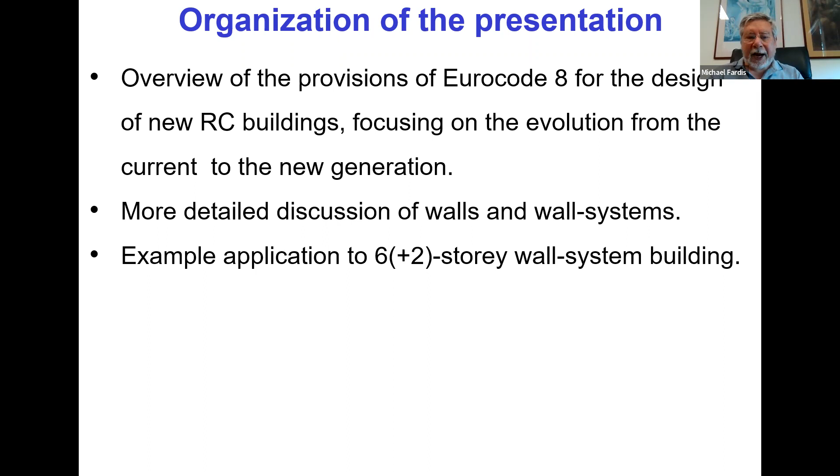Okay, starting on the first part, the timeline of the various generations of the Eurocodes is summarized in this slide.

There was a period in which the pre-standards, the ENV versions, were developed from 1975 until 1992. These were shorter and preliminary versions, which were never applied in practice, but provided the ground for the real Eurocodes.

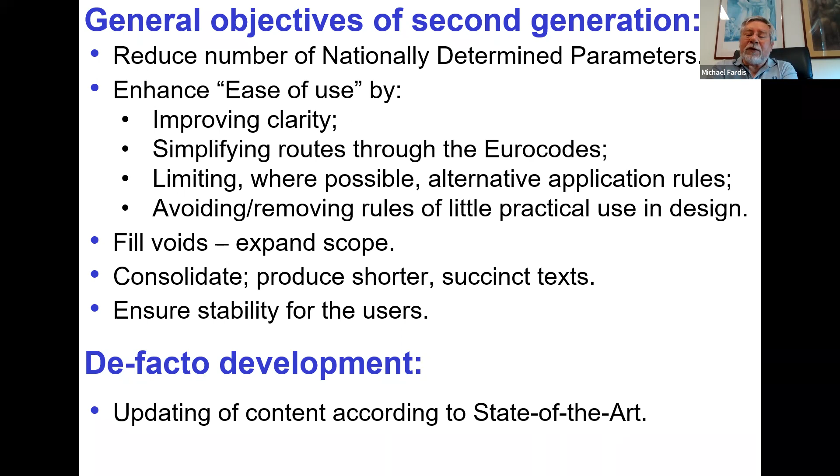In addition, there is a significant effort to add provisions and parts on assessment and retrofitting of existing structures, which exist currently only for Eurocode 8, the seismic design Eurocode.

But the idea is to add similar provisions to all material Eurocodes, as well as to the fundamental Eurocode, EN1990, which is the constitution of all Eurocodes. And this is well progressing. In addition, there is an effort to improve whatever has to do with robustness of structures.

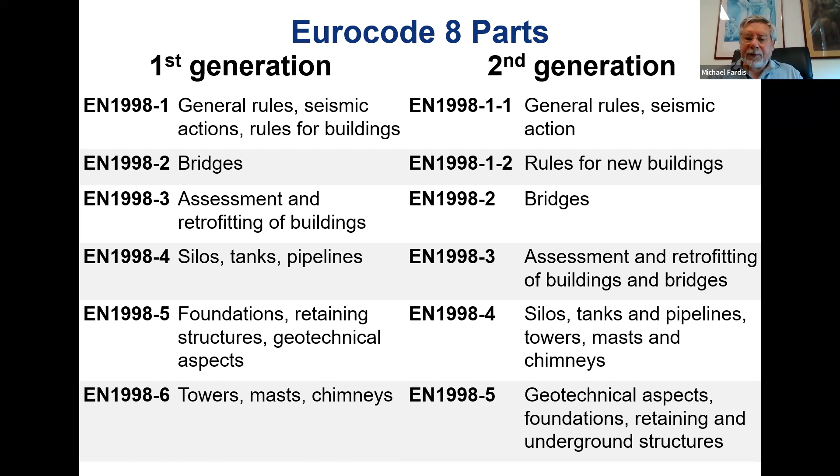And this part will be split in two. The contents of the first one are shown in this slide.

They have the general requirements, whatever has to do with the seismic action, and with general analysis and verification approaches, as well as the deformation criteria and strength models applicable to all types of structures.

This part has progressed a lot and is currently under final editorial polishing, and will be put in public inquiry, as it's called, for comments by national member groups later this year, in September, October.

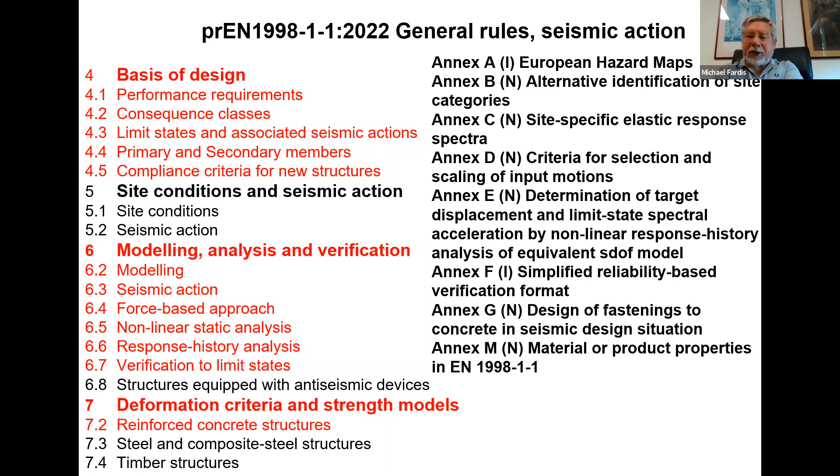And hopefully there will be a vote on it next year, along with part 5, which has to do with the geotechnical structures. The other parts will follow.

And these other parts will include this part 1-2, which is almost ready, but it has to await the other material Eurocodes for concrete, steel, composite, timber, masonry, or aluminum structures, which are still under development. Some of them are less progressed than Eurocode 8, but Eurocode 8 has to be consistent with them, so it has to await their finalization and stabilization.

So this part may be voted rather late.

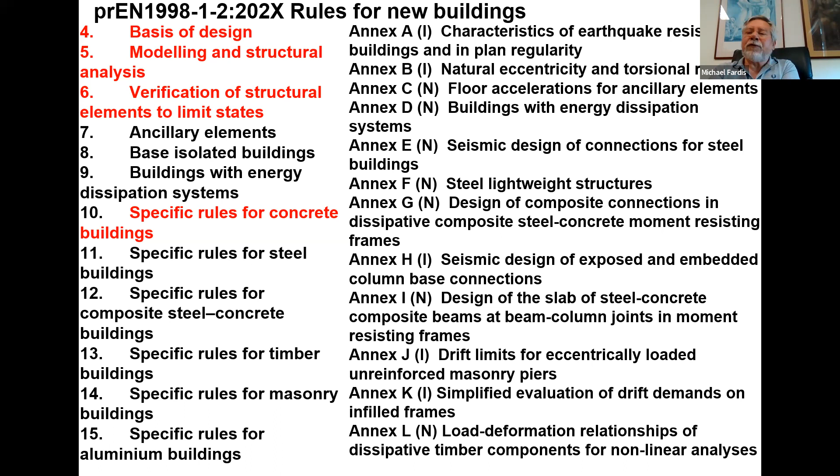The more detailed table of contents for concrete buildings, whatever refers to concrete buildings in this part, or for new buildings, is shown here with the sub-chapters for concrete buildings.

Now, coming to the substance. In the new Eurocode, in principle, there are 4 performance levels, called limit states: 2 serviceability limit states, one operational and one for damage limitation, and 2 ultimate limit states, significant damage and near collapse.

Other parts of Eurocode 8, namely Part 3 on existing structures, cover in more detail possibly all of these 4 limit states, but Part 1-2, which refers to new buildings, focuses on just 2: the damage limitation limit state and the significant damage limit state.

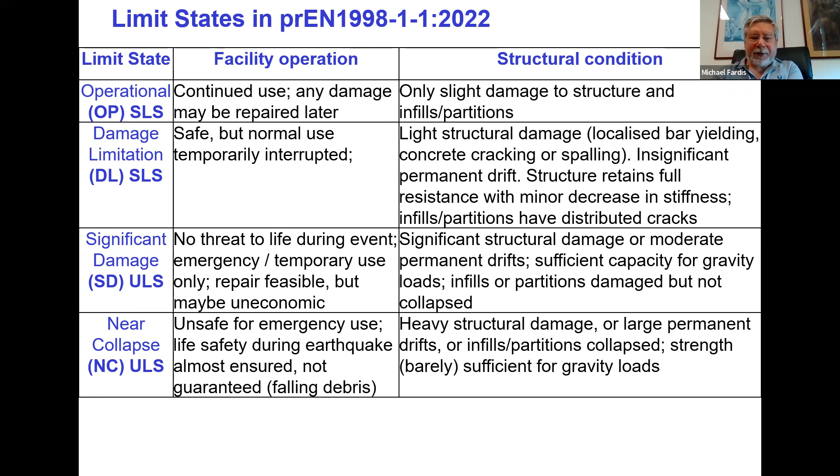As shown in this slide, similar to the current generation Eurocode 8, with emphasis on significant damage and damage limitation under about 500 and about 100-year earthquakes respectively, hidden and without a spelled-out and specified earthquake level associated with it.

We also have collapse prevention under a very strong and rare earthquake through application across the board of capacity design. So we have essentially 2.5 limit states currently and in the new generation.

A detail concerning reliability differentiation: what is currently called importance factor and importance levels, etc., will be called in the future consequence classes, symbolized by CC - consequence classes 1 to 3A and 3B.

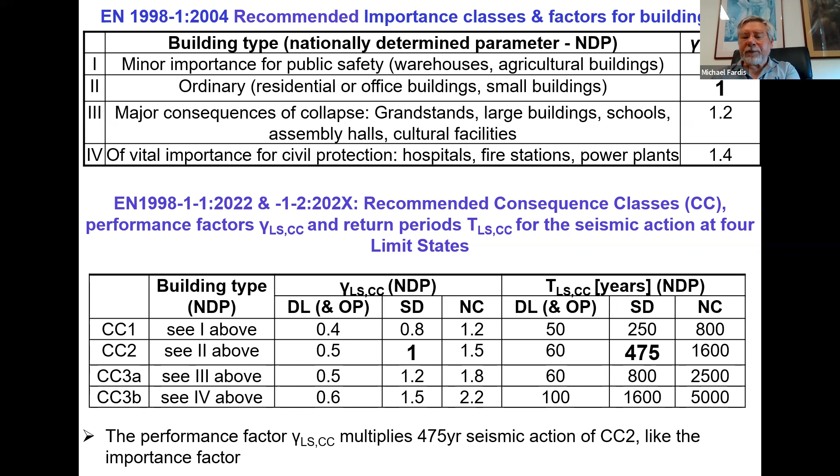But in the second generation, we will have spelled out importance factors, or performance factors as they are called now, and return periods for all combinations of consequence classes and limit states, as shown in this slide.

Some terminology: as I said, the reference seismic action is the one for which new structures of ordinary importance or ordinary consequence class are designed, and its reference return period is a national parameter.

It is up to the countries to choose, but the recommended value is 475 years, which corresponds to a 10% probability of exceedance in 50 years.

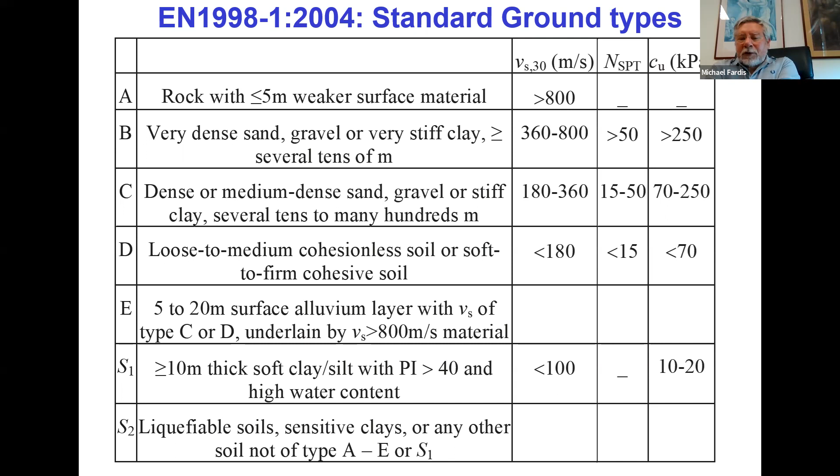Talking about seismic action, this is the list of the standard ground types: essentially hard rock, stiff soil, firm soil, soft soil, and special types of soils, characterized on the basis of the shear wave velocity in the top 30 meters of the ground, VS30, or if that is not available, through the SPT blow count number or the shear strength of the soil.

In the new Eurocode, the standard ground types will be slightly more in number, but not much different in substance. The classification will depend not only on the shear wave velocity, but also on the depth of the soil deposit, which affects the ground motion at the surface.

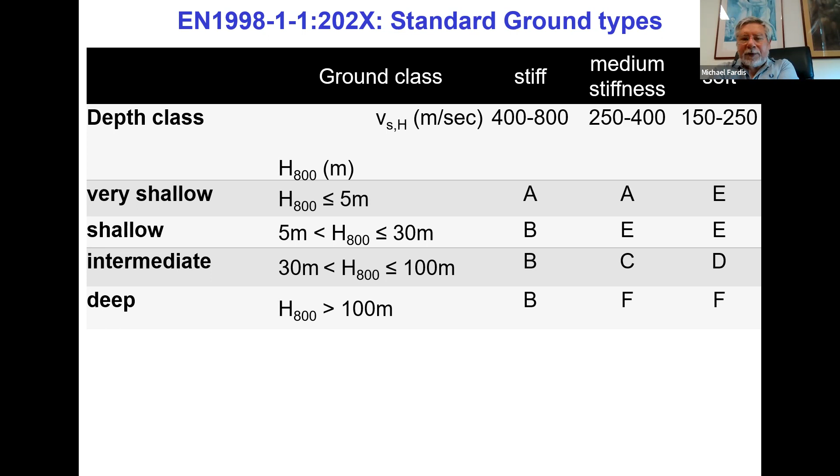An important change is in the characterization, in the specification of the seismic action, which is currently described by a single parameter, the peak ground acceleration on rock. This is the reference parameter to which the elastic response spectrum for 5% damping is anchored, and which is supposedly given in national zonation maps. It will be replaced by two parameters.

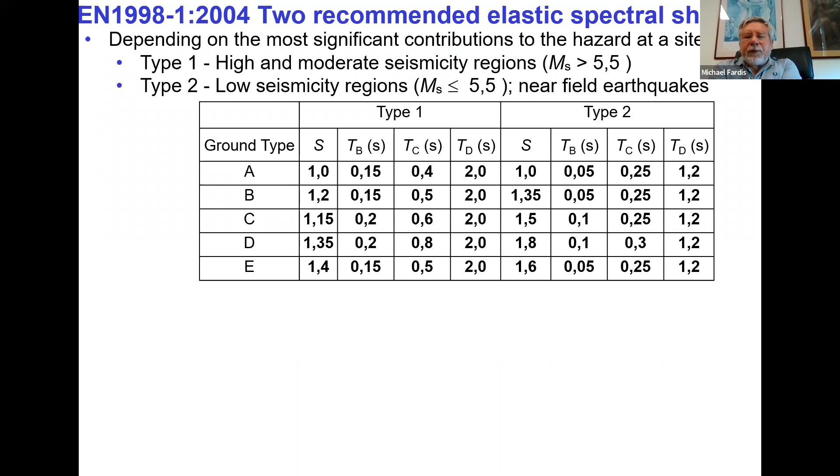On rock: the short period spectral acceleration for 5% damping, S sub alpha, and the 1 second spectral acceleration, again on rock, S sub beta. And instead of the two standard spectral shapes with parameters given in the national annex depending on the seismicity, etc. of the site.

This is the current, recommended characterization of the seismic action with the parameters: the soil factor S, the corner periods T sub B, T sub C, T sub D for the two types of seismic action - one for relatively large earthquakes dominating the seismic hazard, type 1, and the second for low magnitude earthquakes dominating the hazard, type 2.

Essentially, type 1 is for moderate to high seismicity regions. Type 2 is for low seismicity regions, where the hazard is controlled by near field earthquakes. So instead of this type of spectrum, we will have a more complex spectrum described by more parameters. The shape may look a bit frightening, with the number of parameters, but I am sure that all of us will get used to it.

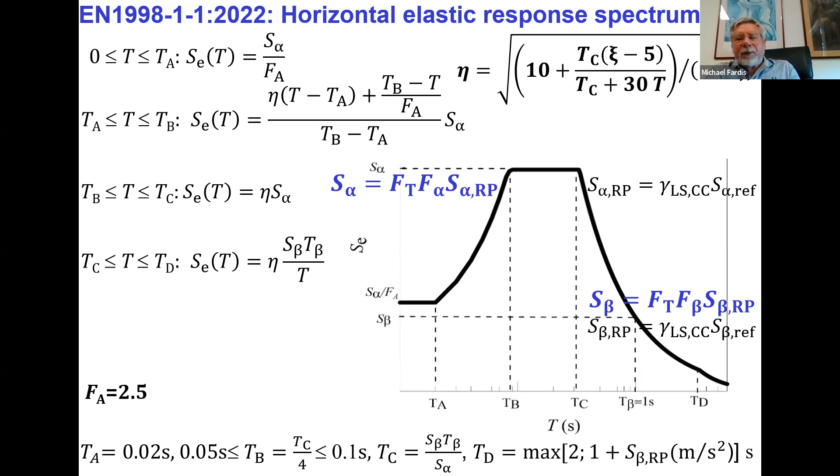Now, for the first time, the second generation Eurocode includes European hazard maps, at least in an informative annex, which some countries object to, and I'm not so sure this informative annex will stay. But this annex, as well as the wealth of information behind it, will be a very useful basis for countries to develop their zonation maps.

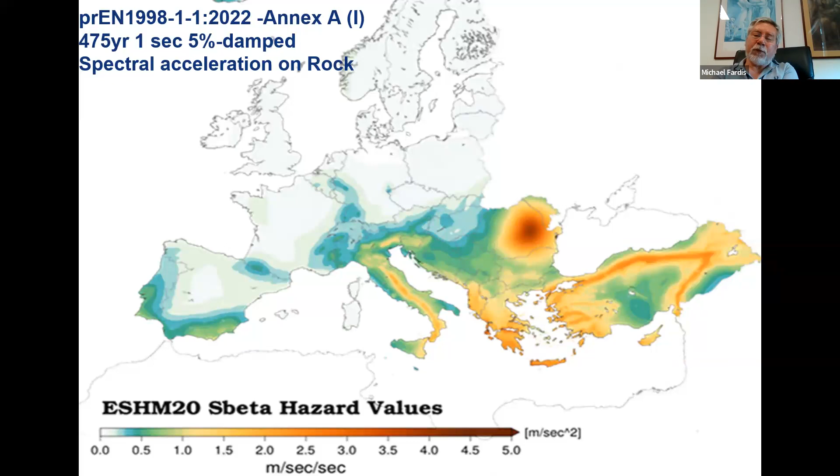And these are the values for the 1 second spectral accelerations, much lower, because Serbia, like other low seismicity regions, is dominated by near field earthquakes and small magnitude ones, which attenuate faster with distance. But you can see in both maps the very high values in the Vrancea region in Romania. These are deeper earthquakes, which are rich in longer periods, and attenuate slower, so they may affect tall buildings at long distances. This is an issue possibly for parts of Serbia.

Okay, this again complicated slide gives the nonlinear amplification of spectral values with level of seismic action as a function of the shear wave velocity, etc. Much more complex presentation than the current one, which is so simple that it is simplistic and it is obsolete. The current description of the seismic action, I would say, is well behind the state of the art and the current level of knowledge in Europe.

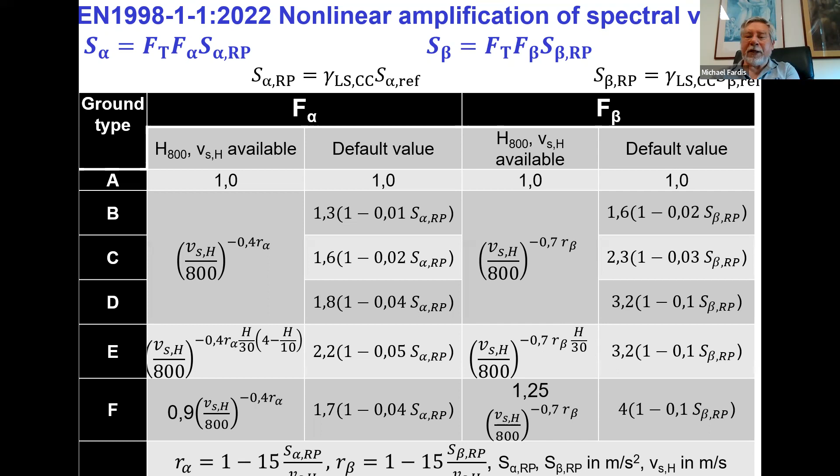Going now to design. I will not talk about displacement-based design based on nonlinear analysis, which is an option allowed in the first generation and given full support and more details in the second generation. I will focus only on ductility-based design using the force reduction factor, what is called in Europe the behavior factor Q, which divides the elastic spectrum to convert it into a design spectrum.

So on the basis of the value of Q, the behavior factor, and the ductility level, both versions, the current and the new, have three ductility classes: high, medium, and low in the current situation, 3, 2, and 1 in the new one. The change in numbering is for convenience to countries for which the letters H, M, and L don't automatically relate to high, medium, and low. So we will have 1, 2, and 3, but essentially the meaning is like low, medium, and high, although the substance is different.

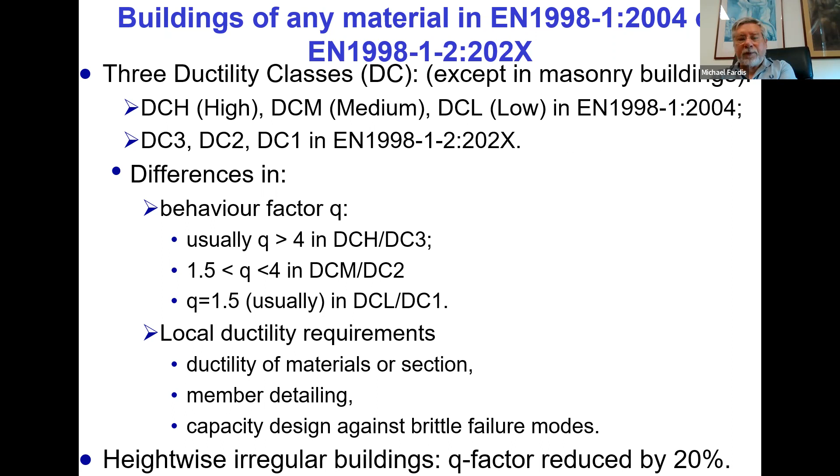The behavior factor has been split into 3 factors. One, due to overstrength, equal always to 1.5, and considered to be available irrespective of detailing and any ductility in design. A second factor, q sub R, which accounts for the redundancy of the structural system and the possibility of redistributions. And the third accounts for ductility.

Two special cases are the inverted pendulum systems, which are those which have most of the mass concentrated at the upper third of the height, or depend on inelasticity only at the base of one or a few elements. And another special case, what is called torsionally flexible structural system, which may be of interest to buildings with a core of walls in the center and frame members and columns which contribute little to the lateral force resistance, closer to the perimeter.

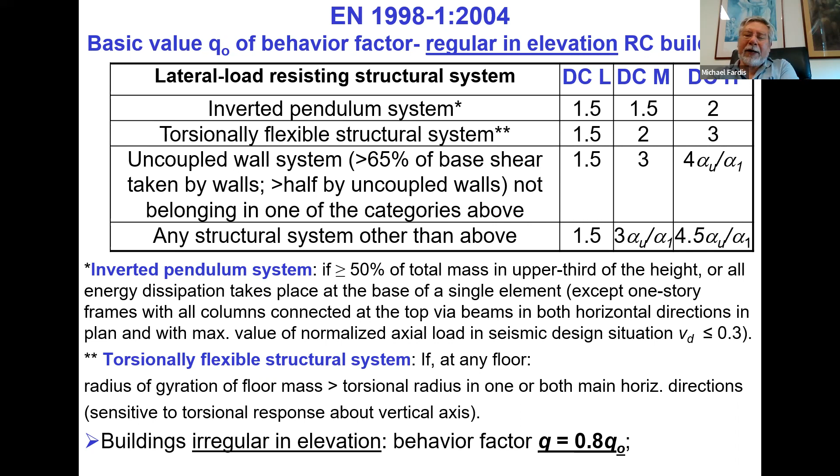These are typically torsionally flexible in the sense that their fundamental period, mode number one, is torsional. And these are sensitive to accidental eccentricities, to torsional components of the seismic action, and to other factors for which design does not account. So they are heavily penalized in the current generation, but less so in the new generation. We will come back to that soon.

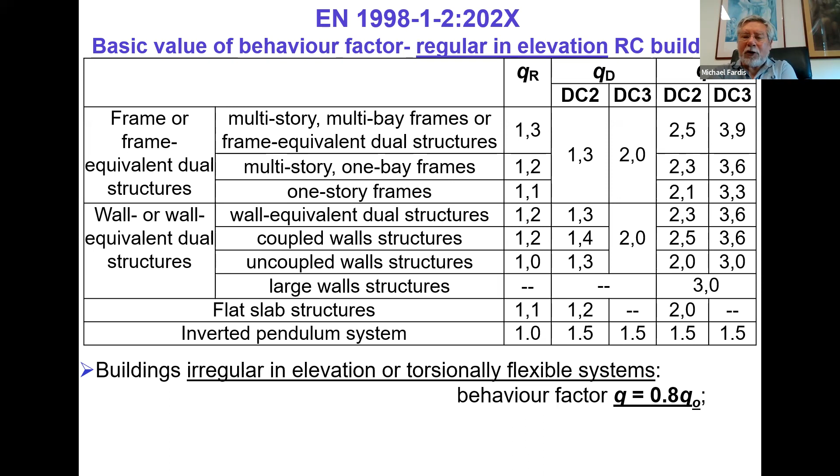The current first generation does not pose very strict restrictions on the choice of the structure system or the ductility class. The only restriction is the discouragement of ductility class low for cases other than low seismicity, which means PGA at ground surface above 0.1 G, or spectral acceleration in the short period range above 2.5 meters per second squared.

Now, in the coming version, there will be more restrictions on the use of ductility classes and various types of structure systems, depending on seismicity, as shown near the bottom of this slide. Especially for flat slab frames, which are not allowed essentially above 0.2 G peak ground acceleration, and also for the use of wall structures in DC2.

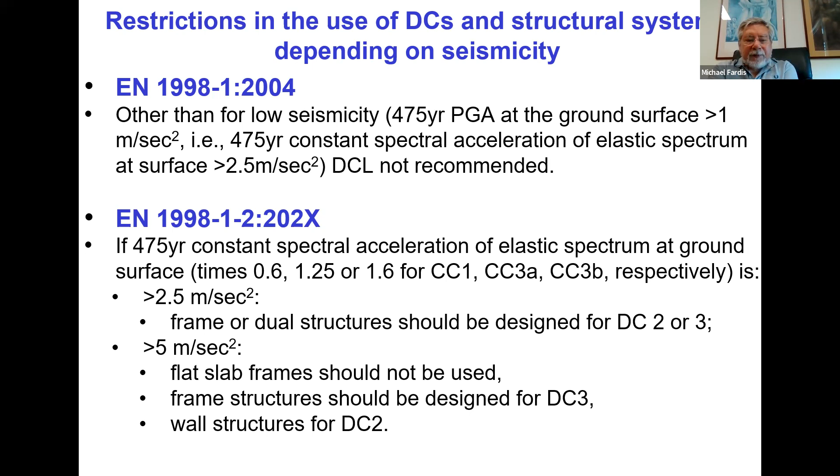Both the current version, with very minor differentiation, require capacity design of beams and columns in shear, recognizing the possibility that plastic hinges may form either in the beams or in the columns, depending on whether the columns meet the capacity design condition in flexure. The overstrength factors gamma RD, applied in this calculation of capacity design shears, are reduced a bit, by 10-20%. So this makes the capacity design in shear a bit more economic.

Now, in both cases, in the current generation and the new one, there is a link between behavior factor Q and the ductility factor, which in the current generation is expressed through the curvature ductility factor mu sub phi, related to the Q factor through the relations shown at the top of this slide, depending on fundamental period. These are approximate relations, not of general applicability, which work a bit on the conservative side—they are rather safe-sided.

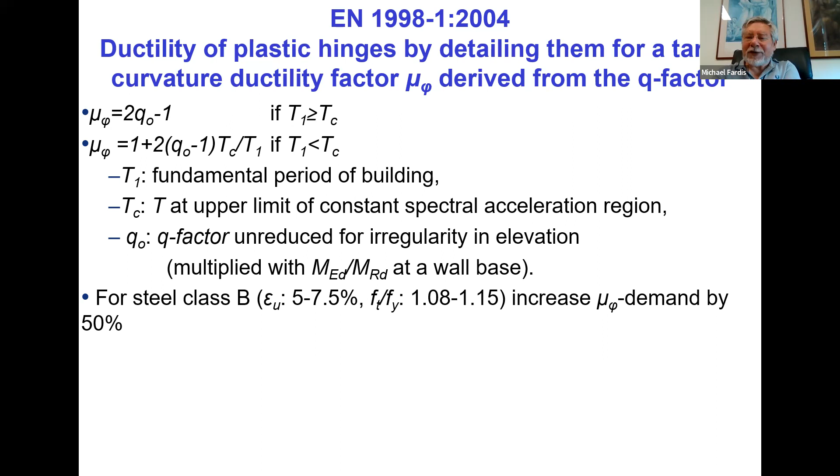In the second generation, this link between ductility and behavior factor is achieved through the chord rotation ductility factor, and it is more direct and more transparent.

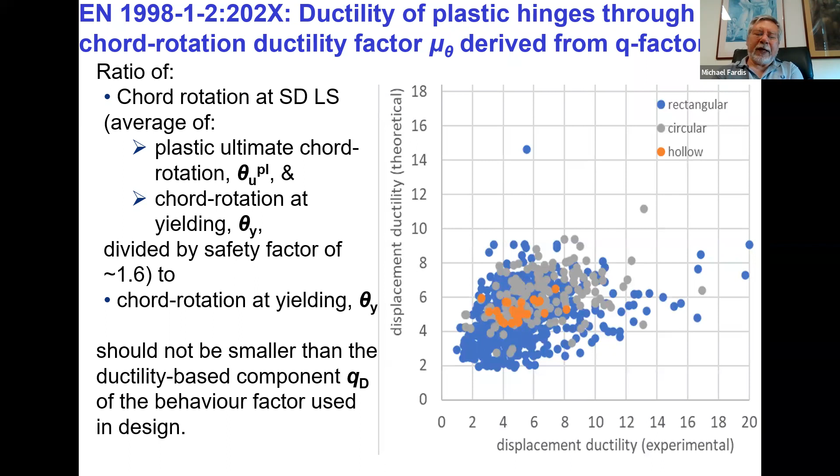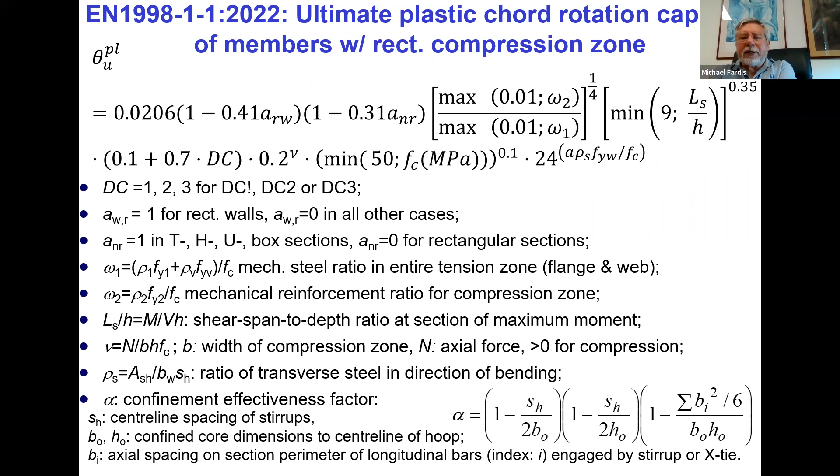Eurocode part 1.1 gives explicit relations to compute the chord rotation at yielding. These relations are given in part 1.1, as well as for the plastic rotation capacity of members with rectangular compression zone—columns, beams, walls, rectangular or non-rectangular, etc. This is a complicated but relatively accurate relationship included in part 1 of Eurocode 8.

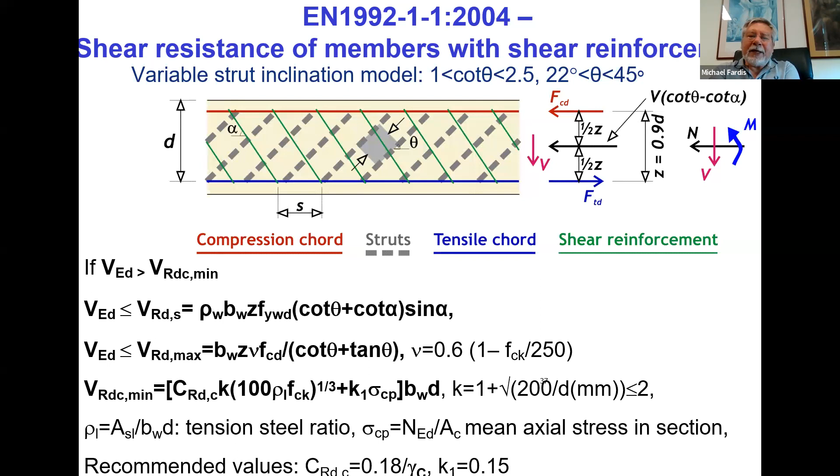Now, coming closer to the end of the first part of my talk, another major change in the second generation, which affects mainly walls, is the calculation of the shear resistance, which has to follow always the provisions of Eurocode 2, summarized for the current generation of Eurocode 2 in this slide.

In case of ductility class H beams, the strut inclination is always taken at 45 degrees. The same applies for ductility class H walls, for which there is also a 60% reduction in the shear resistance due to diagonal compression in the concrete, web compression. This is the VRD maximum, which in the case of walls of ductility class H is just 40% of the normal value.

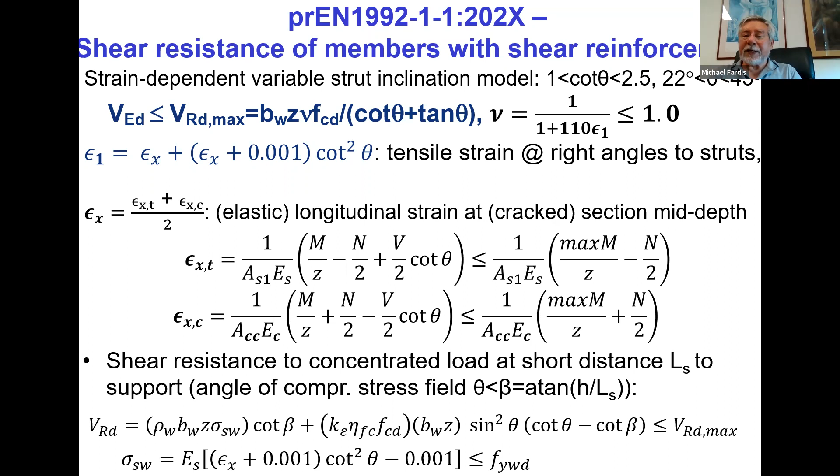Now, it happens that with a reduction by 1.6 of the monotonic shear resistance due to diagonal compression in the web, and with a very easy estimation of the inelastic longitudinal strain by multiplying the elastic moment by the Q factor used in the design, one has very good agreement with experimental results for cyclic loading for all types of members. So with a very minor modification of the new Eurocode 2 approach, one has a general procedure applicable for all ductility classes—1, 2, and 3—in seismic design, which is much more economic than the present one for walls.

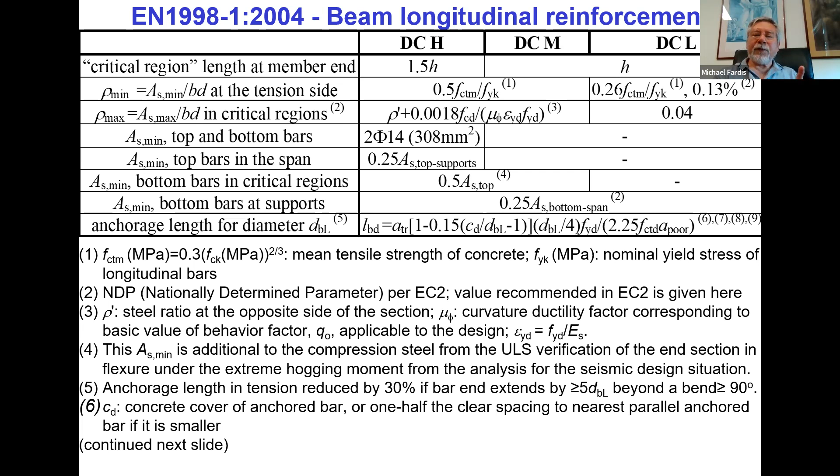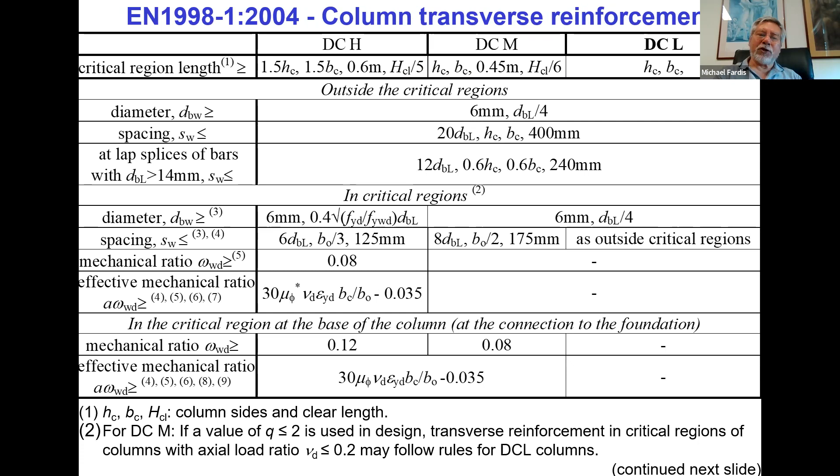I finish this part by just showing, without going into detail, tables which list the detailing provisions of the current Eurocode for ductility class H, M, and L, for beams, columns, and walls, separately for longitudinal and transversal reinforcement. The prescriptive detailing provisions of the second generation are shorter and less complex than those of the current generation, which is clear from the fact that the tables for the current generation are much longer than those for the new generation.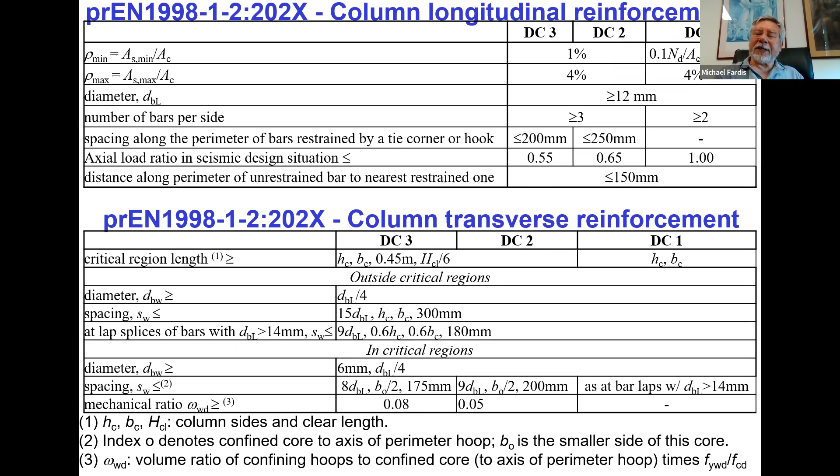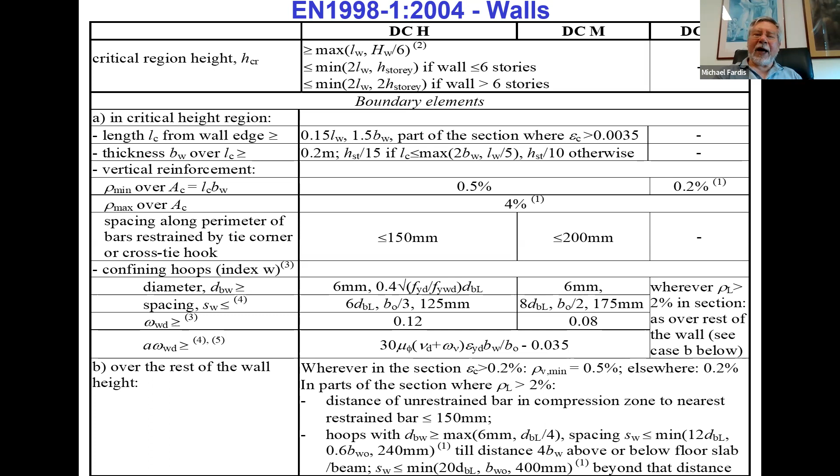These tables summarize in a friendly way all the detailing provisions—minimum, maximum, and special design provisions—for beams, columns, and walls. The provisions for walls in the current version cover 3 or 4 pages, while the provisions for walls in the new generation are just 1 page, much shorter and simpler. So we hope that in the future the use of walls will be easier and more friendly to the designer, and more reasonable in terms of cost, without loss of safety.

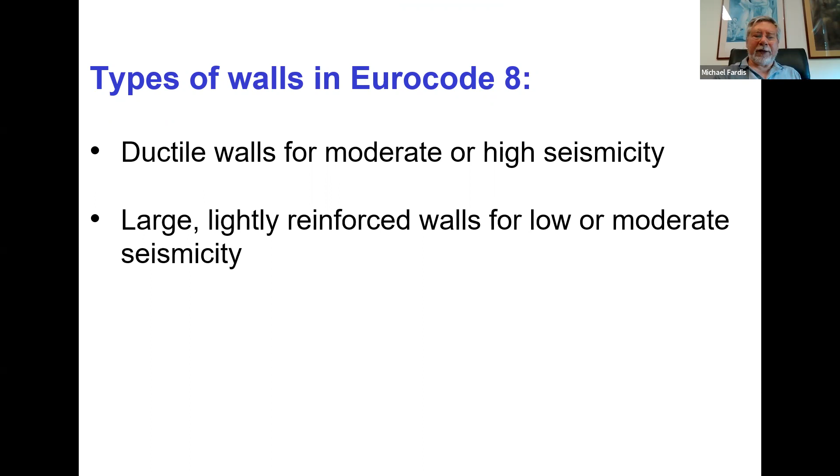Coming now to the second part of my presentation, I will say a few more things about walls. There are two types of walls in Eurocode 8: ductile walls, which are the usual ones, and large, lightly reinforced walls.

The large walls are popular in France. I will show you examples of large walls, not from France, but from Greece, from Patras, from other parts of the country. These are walls which physically cannot develop a plastic hinge at the base, and they don't need that much reinforcement, so they have special design provisions for them.

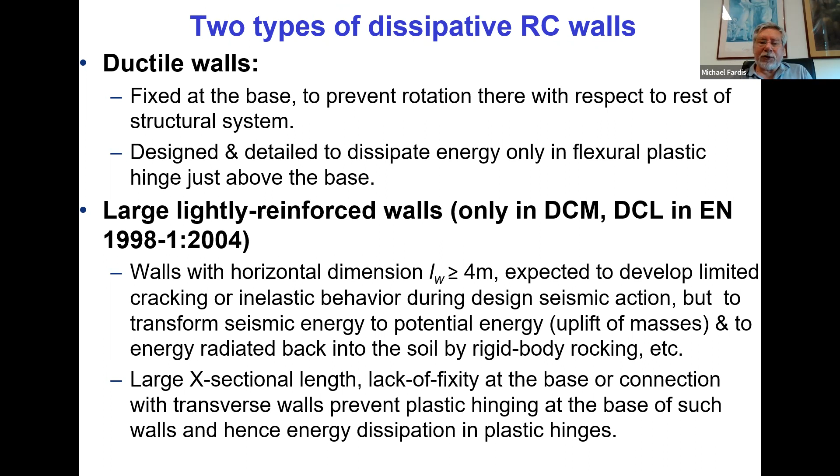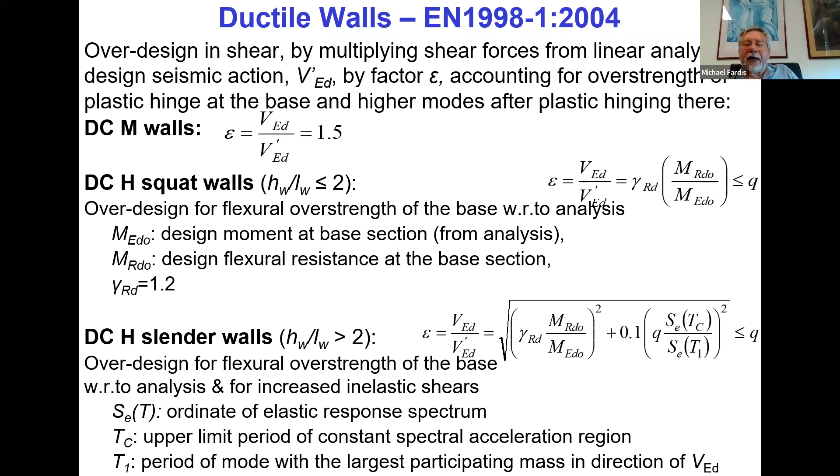The ductile walls are designed and detailed for developing a single plastic hinge at the base, and they are severely over-designed in shear, not only against the overstrength between the capacity and the moment from the analysis, but also for the higher mode effects on shear, because a wall keeps vibrating above the base even after development of the plastic hinge, and the shear forces do increase considerably. So there is a considerable magnification of the shear forces compared to those from the analysis in upper stories.

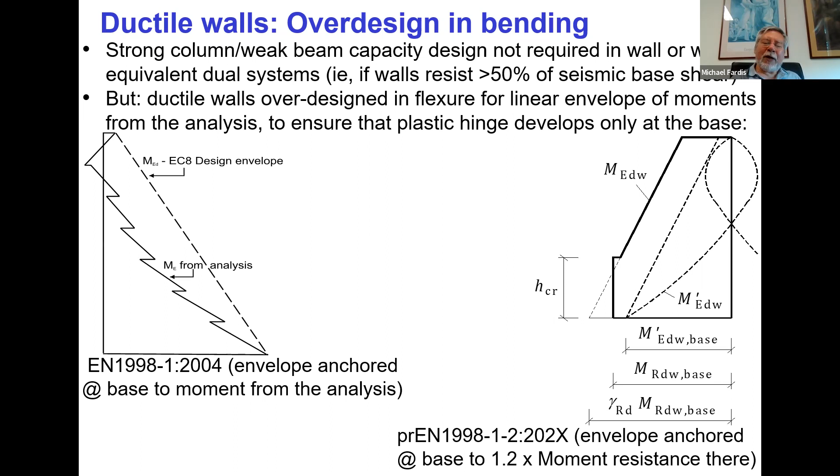This magnification is kept and made even more demanding and severe for ductile walls in the new generation, but fortunately the relaxation of the resistance provisions makes these walls easier to design. Everything from the envelope of shear forces to the envelope of moments for the design is on the safe side for ductile walls, aiming and making sure that inelasticity will develop only at the base of the wall.

By contrast, for large walls there is an effort to avoid overstrength, to have as little strength as the analysis requires, and there is very little additional or minimum reinforcement.

Even for horizontal reinforcement, these provisions go to the point that they allow avoiding horizontal reinforcement at all. One can design, under certain conditions, large walls with only vertical reinforcement and horizontal reinforcement only at very, very few places. This may sound strange and against the provisions of Eurocode 2, which require horizontal reinforcement against wind, against any type of action, for all types of walls.

So if you design a wall according to Eurocode 2 for wind alone, you should place horizontal reinforcement. If you design it for earthquake, under certain conditions, you can put no horizontal reinforcement. There are two reasons for that. First of all, the earthquake is a dynamic action.

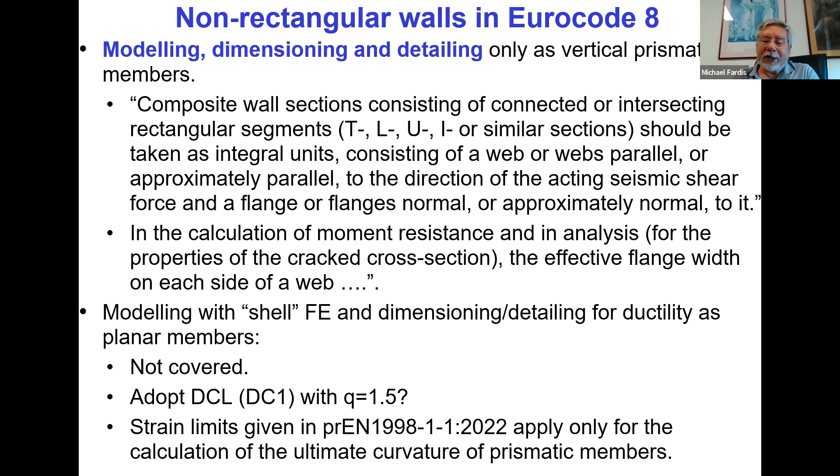But even when one applies elastic analysis and models those walls with shell finite elements, the new generation of Eurocode 8 gives strain limits listed in this slide. They are, strictly speaking, not applicable to such a case.

They have been developed to address the calculation of ultimate curvature for use with the plastic hinge length for prismatic members. So it may be far-fetched to apply these strain limits to walls with composite sections modeled and analyzed with shell-type finite elements. So this is a dark area.

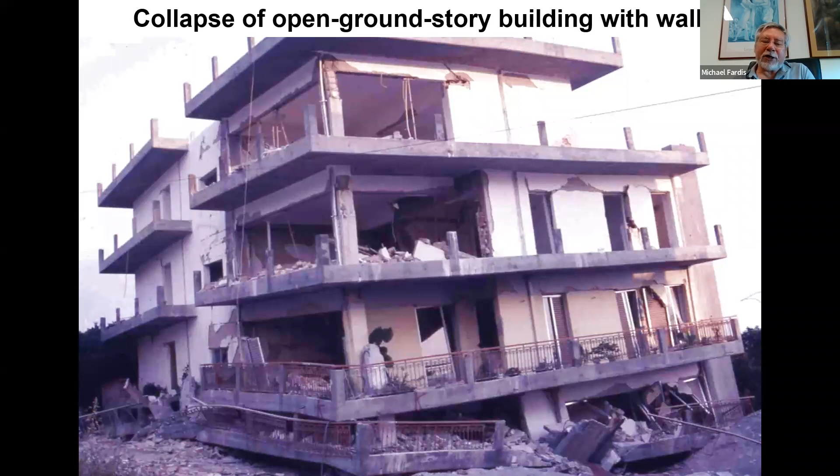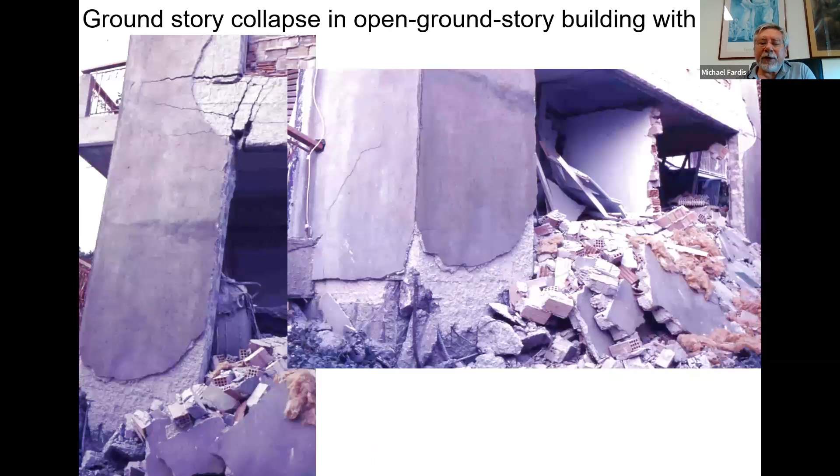I finished the part on walls by showing you some slides on damage of walls in past earthquakes. This is a building with walls at the ground story, and you see the failure after the collapse of this building. These are typical pictures of shear failures, which are very common in walls in buildings. I have seen many shear failures in walls, very few flexural failures. All these are shear failures.

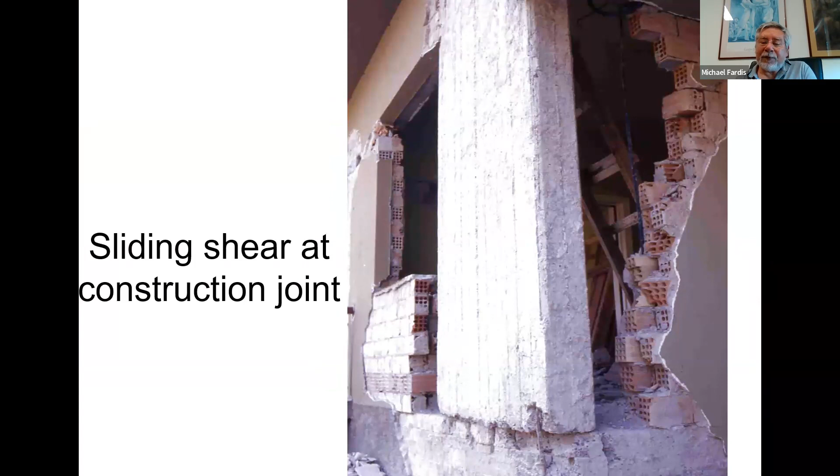This is a shear failure, but a sliding type of shear failure at the base of a wall at the construction joint. This is the only case I have in my collection of slides from damage in earthquakes in Greece, where in addition to a shear failure, there is also flexural failure in both tension and compression at the base of a wall.

The walls have many advantages, and they have been used in many parts of the world. They have been very popular, and sometimes they have been overused. One example is in Central and Latin and South America. Following the very good performance of wall buildings in Central American earthquakes, they have become very popular throughout South America.

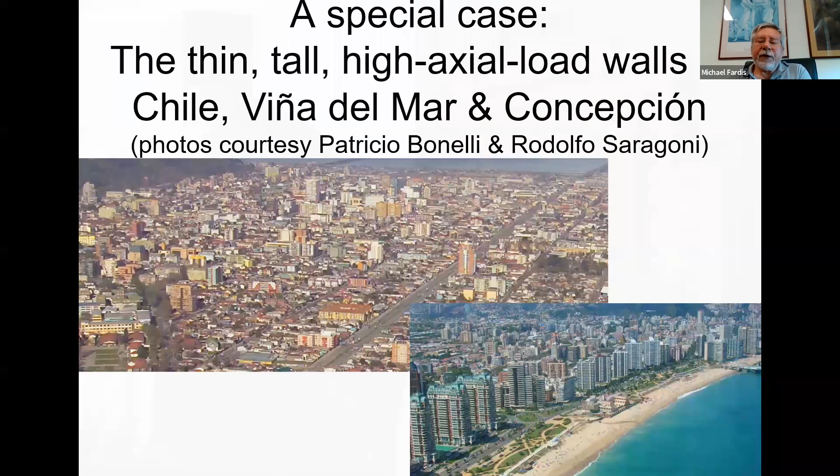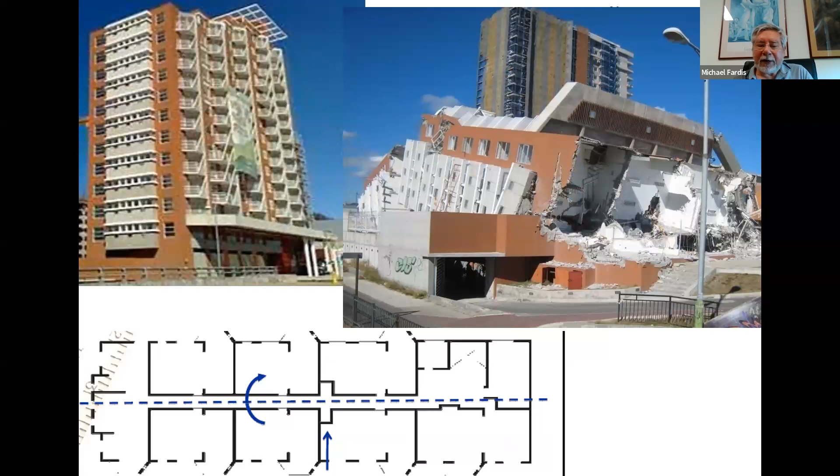Other examples, and one case where the building shown on the left has collapsed, as you see on the right, and you see the framing plan at the bottom. Similar cases.

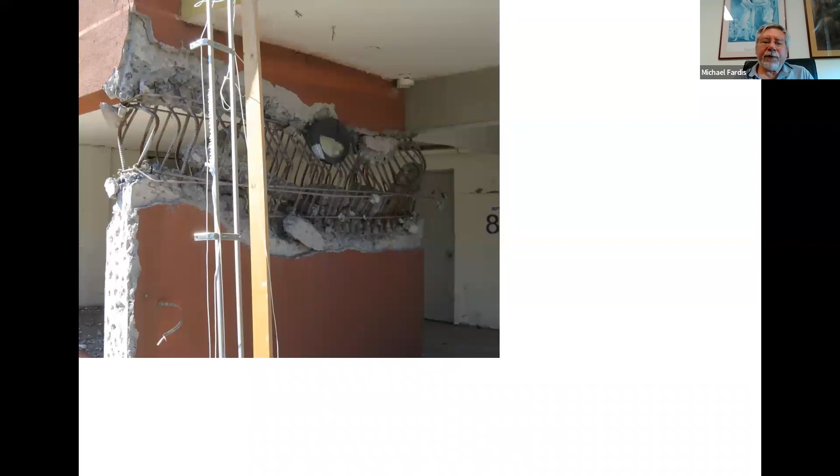Heavy reinforcement, but very little confinement, because even if you place confining reinforcement with such a small thickness compared to the length of the wall, and such a high axial load because of the height of the building, it is not feasible to achieve confinement over a significant part of the section. So all these walls failed spectacularly.

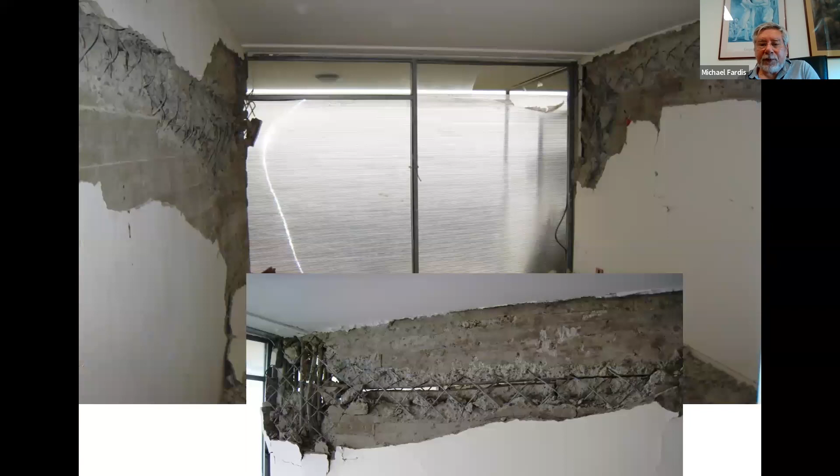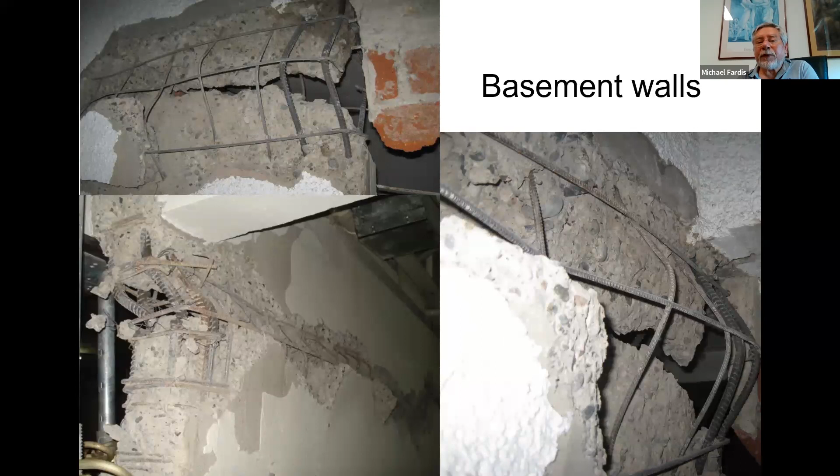You see all these failures, which have very clearly the signature of high compression. I would not call them shear failures. They are more compression failures due to combination of bending and axial load. And it's clear that there was no confinement in these walls. This may have to do with the way these walls were designed and detailed.

So one has to be careful with overdoing it with walls. In parts of South America, these thin walls were constructed, maybe they are still constructed, with a single curtain of reinforcement at the center of the section, not with two curtains on two sides. Examples to be avoided.

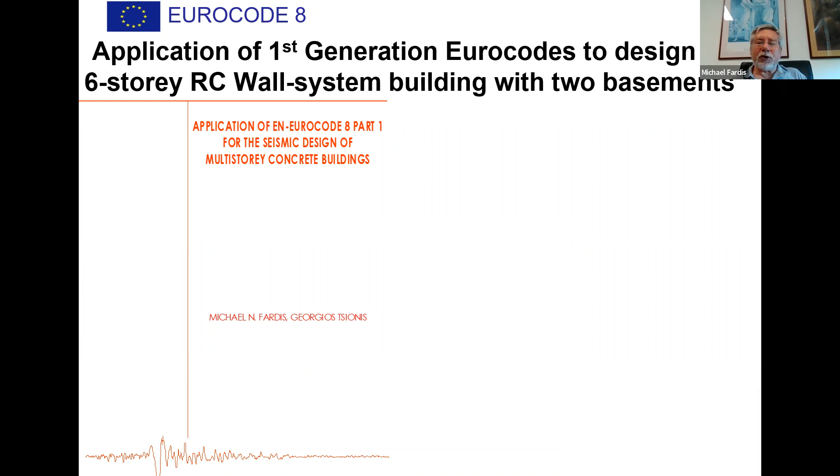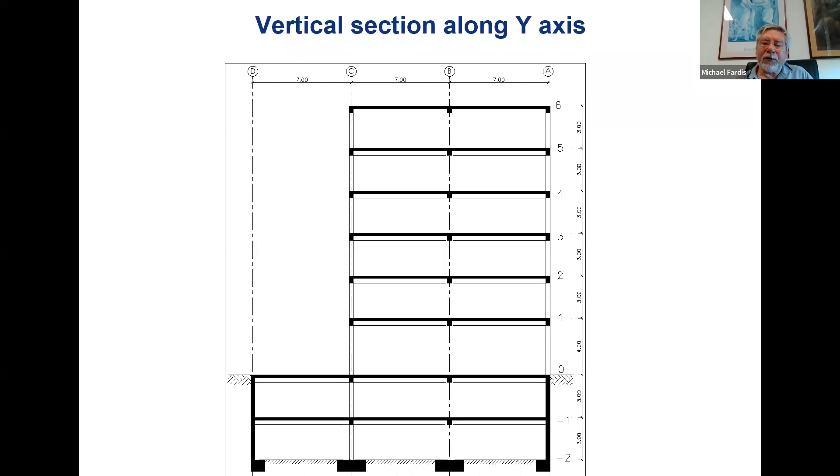Now, I will finish with just showing, without going in detail, an application of the first generation Eurocode to a six-story building with two basements. This so-called Lisbon example, because it has been used as the basis of a workshop about 15 years ago in Lisbon. And the workshop has built on this structure and this design for the application of this first generation of Eurocode 8.

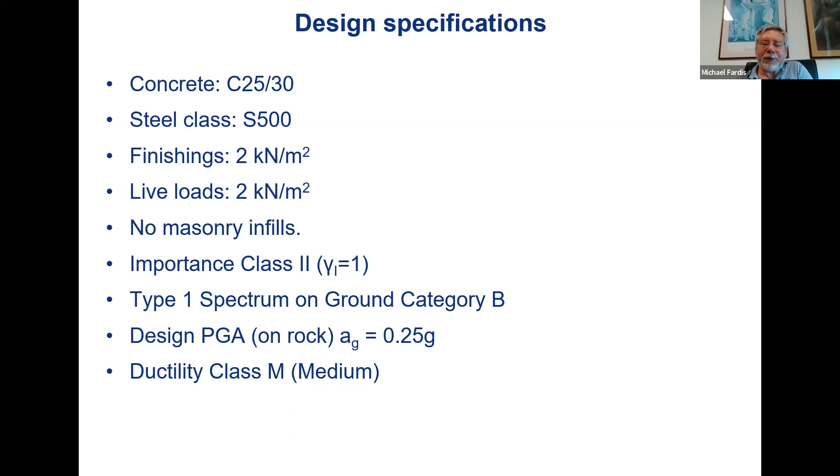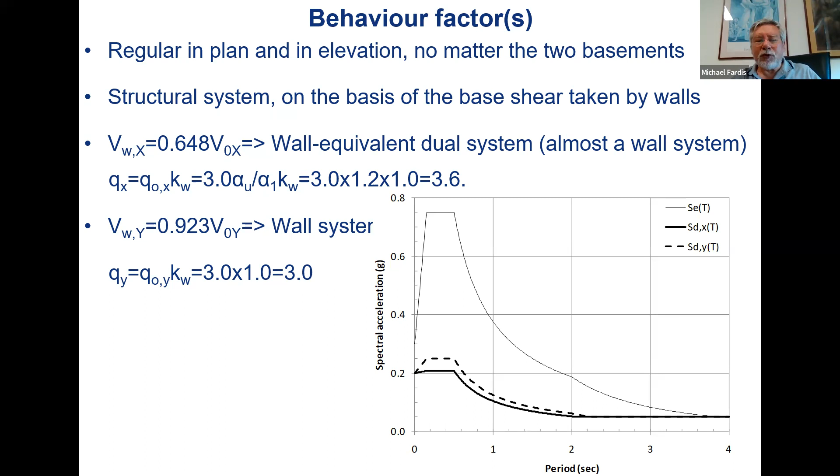These are the design parameters: C25, S500, peak ground acceleration on rock of 0.25 G, ductility class medium. The building is clearly a wall system in the y direction, in the vertical direction, as you see it on these slides, and nominally a dual wall equivalent system in the other direction, in the horizontal direction, because walls take 65%, just a little bit less than 65%, of the base shear. If they were 5 centimeters longer, this would have been also clearly a wall system.

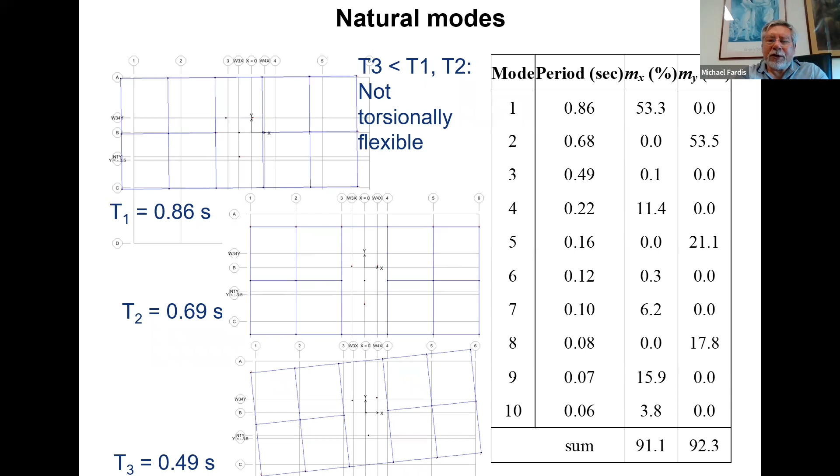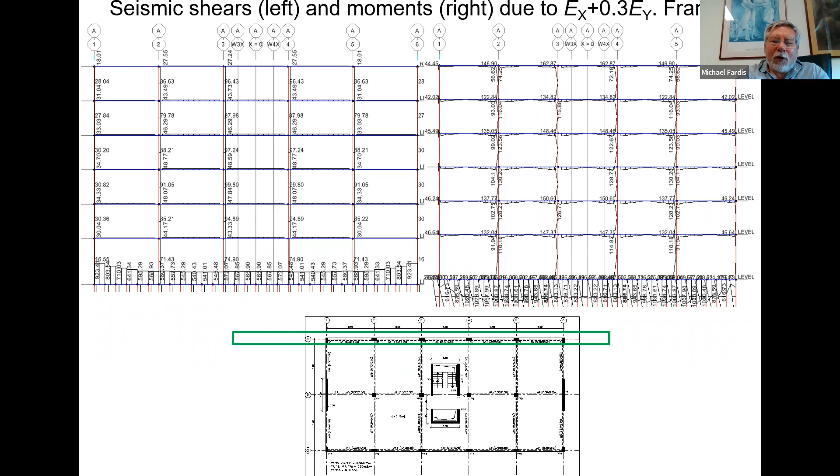These are the periods from Rayleigh quotient and these corresponding spectral values. These are the fundamental modes, translational in both horizontal directions. The third mode is torsional. The interstory drift ratios and diagrams for bending moments and shears in the various planes of the building.

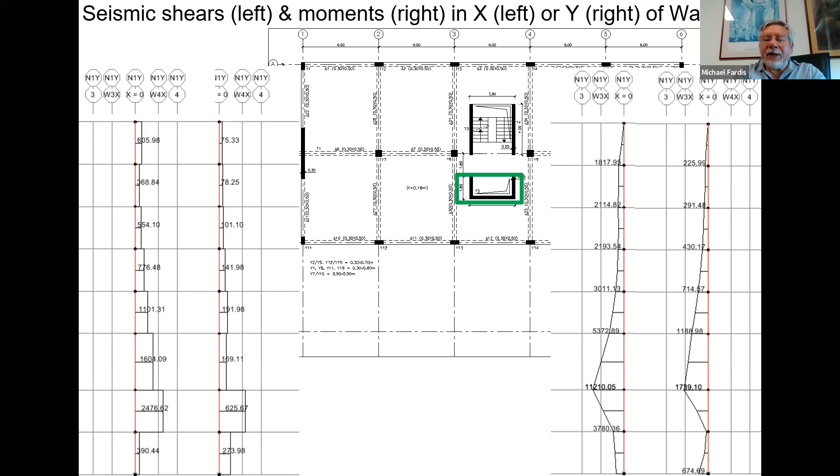I will not go in detail in this, you will have the full presentation shared. I want to point out that the perimeter walls of the basement, two-story high, were modeled as and dimensioned as deep beams on elastic foundation, modeled with sub-elements of about 1 meter length. Each span of the perimeter walls split into 5 or 6 such sub-elements.

All of them on vertical Winkler type springs, which however have a shear stiffness appropriate to model the shear stiffness of the perimeter walls in a vertical plane. And the perimeter walls, both for gravity loads and seismic loads, were designed and detailed as deep beams according to Eurocode 2.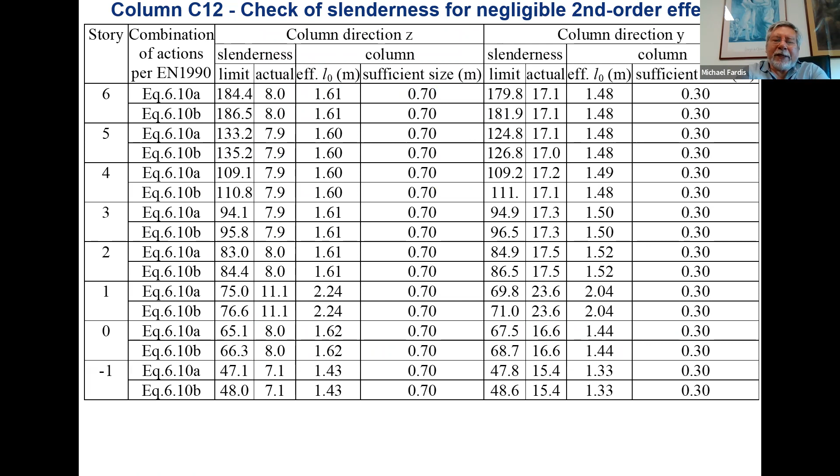And for a single representative column, detailed tables with all the steps for their design according to Eurocode 2 and Eurocode 8. All the details for this column, a single column, in all its stories.

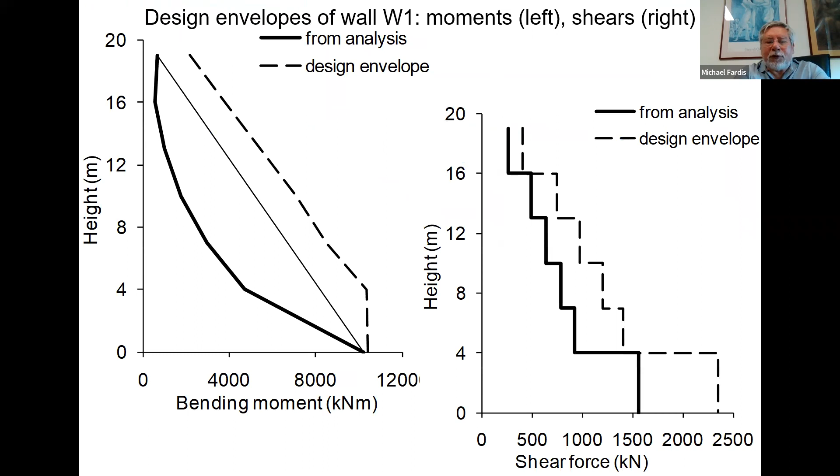There are more detailed results for the 3 types of walls: the rectangular walls at the perimeter, with the envelopes of moments and shears, and the cross sections.

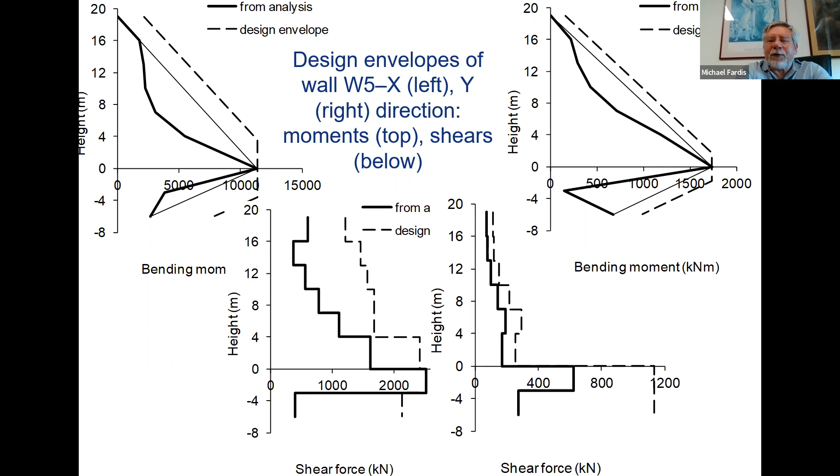The rectangular walls near the center of the plan, which goes through the 2 basements as well, with their moment and shear envelopes, and the detailed numerical results.

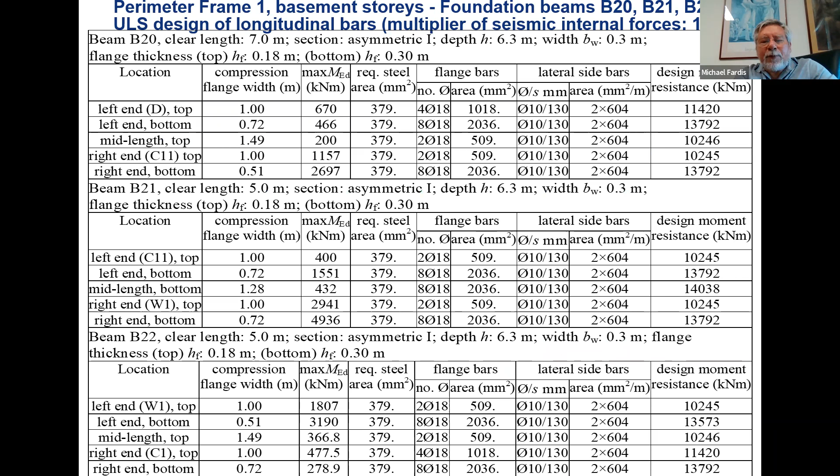And finally, an example of the reinforcement in the basement walls considered as 2-story tall deep beams, with their reinforcement, which is controlled essentially by the provisions of Eurocode 2 concerning crack control in beams.

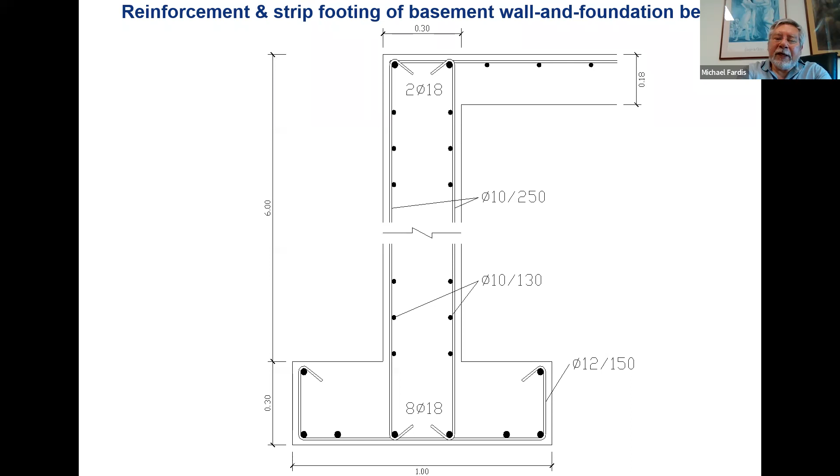The reinforcement required at top and bottom for bending is significant, but what is more interesting is the amount of reinforcement required for crack control all along the 2 stories of these basement walls.

There are also calculations for 1 footing of an interior column, etc., and corresponding drawings.

I do hope that by the time we get together again in September, hopefully in person, I will have this example done also with the 2nd generation, and I will be able to draw some conclusions.

And with this, I want to end my presentation. Sorry that I took longer, and sorry for tiring you so much. I hope that we have time for questions.

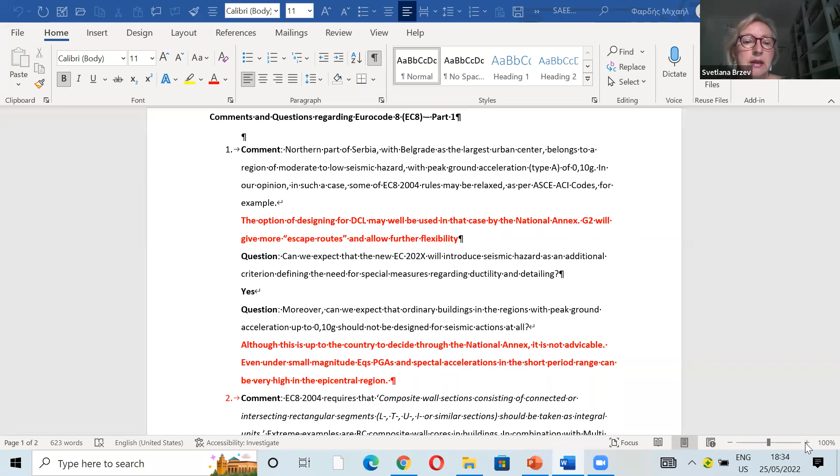Okay, first question or comment. It says that essentially the northern part of Serbia with Belgrade included is a low seismic area with a peak ground acceleration of 0.10 g, and some of the Eurocode 8 rules can be relaxed, etc.

Yes, in fact, the case is at the border of applying the option of DCL, but at least according to the Eurocode rules, this is an option to be exercised by the national annex, by the national authorities. It is not up to the designer to relax the rules. This has to be decided by the national authorities through the national annex.

Of course, national authorities have the authority to specify whatever they want through regulations. Standards are different from regulations, and regulations, like presidential decrees, etc., can apply in parallel or overrule the standards. So the national authorities can do whatever they want. Designers cannot by themselves do it.

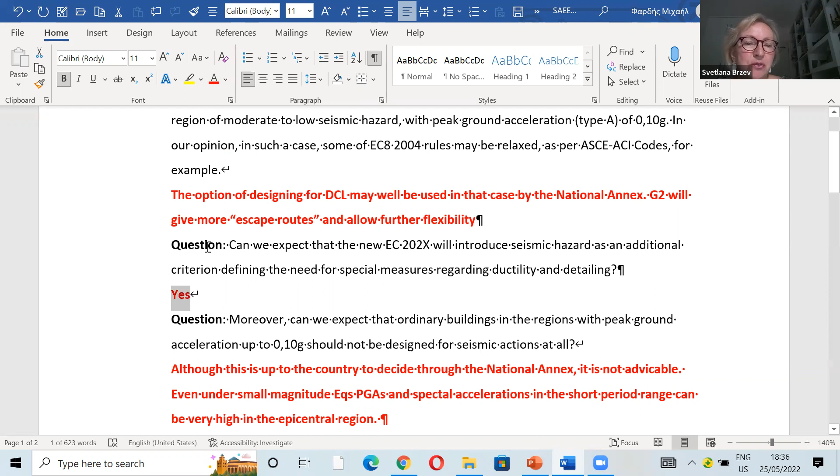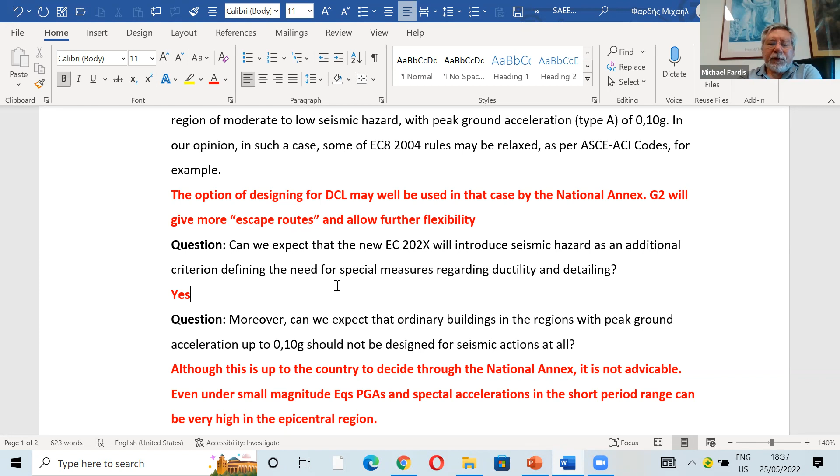The second question: whether seismic hazard will be an additional criterion defining special measures regarding the detailing. Yes, as I touched on this issue during the presentation, but in general there will be more flexibility and additional options depending on the seismic hazard and importance.

The other question asks whether one can avoid designing for earthquake at all for peak ground acceleration up to 0.10 G.

Again, this is something that the National Annex could allow. Personally, and most people I know in the earthquake engineering business, would not advise such a practice. Because even in low seismicity regions, small magnitude earthquakes can cause very high peak ground accelerations and short period spectral accelerations, which may penalize, may hit stiff buildings.

And if they have absolutely no ductility and no design for earthquake, damage may be heavy and collapse may not be ruled out. So I wouldn't advise not doing any seismic design at all for peak ground accelerations around 0.10 G.

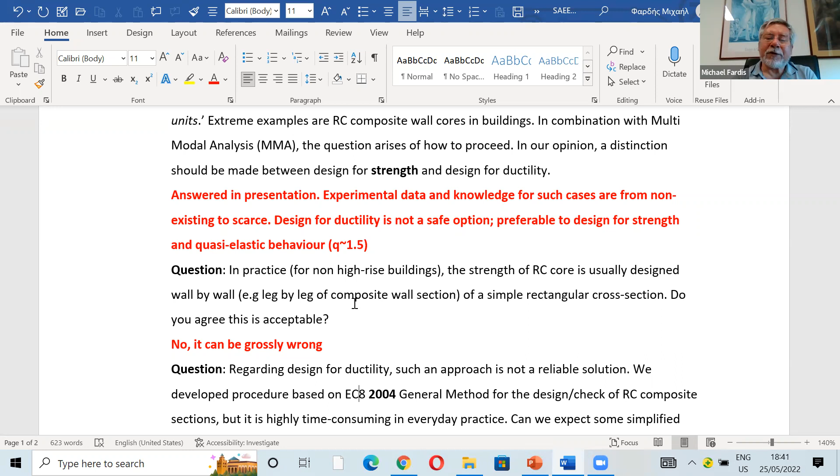Concerning possible simplification of the approach for composite wall sections, I don't think that one can simplify the treatment of this case very much, because there is no ground to base such a simplification with confidence.

How do we apply the moment envelope requirements for composite wall sections? As I said, the only case addressed in Eurocode 8 is walls modeled and designed, detailed as a single prismatic cantilever element with various stories. And the moment envelope provisions apply to that case.

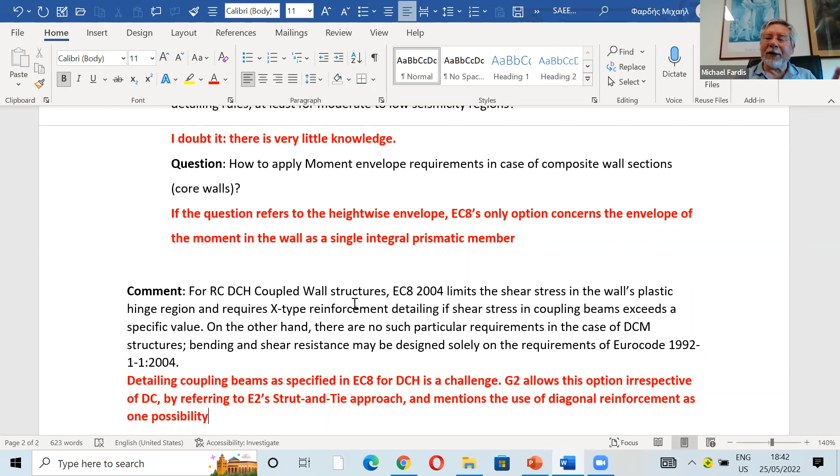The last question concerns coupling beams and design of walls in shear. The detailing provisions for coupling beams currently refer only to ductility class H coupled walls, and they are a challenge to apply, not only in design, but mainly on site.

In the second generation, the provisions are not so detailed for coupling beams, and they just mention the possibility of applying strut-and-tie models, which may imply introduction of diagonal column-like elements along the struts as a possibility. It says that the strut-and-tie approach may be used. Other approaches, including the conventional type of reinforcement with horizontal longitudinal bars and vertical ties, are acceptable.

The final question points out that essentially in ductility class M walls, both coupling beams and the walls themselves, the provisions for shear do not have any special reduction due to the cyclic nature of the loading. Yes, indeed, they don't.